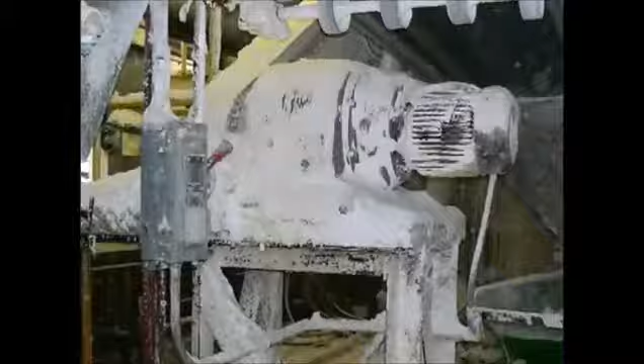No company wants to see its facility blown up and destroyed and its employees killed, but they just don't understand what the hazard is. They don't realize that they have a hazard here until that one day when the explosion occurs, and it's a terrible tragedy for them. And they look back and say, if we'd only known.

When Tammy Miser got a phone call late one evening in 2003, she worried it would be about her brother, Sean Boone, who worked at an automotive parts factory. We usually didn't answer the phone that late, but we knew when it kept ringing that there was something wrong, so we answered it.

There had been an accident there before, so I knew. I knew if they were calling me, it was my brother.

Sean Boone was a mechanic at the Hayes Lemmerz plant in Huntington, Indiana. The company produced aluminum car wheels.

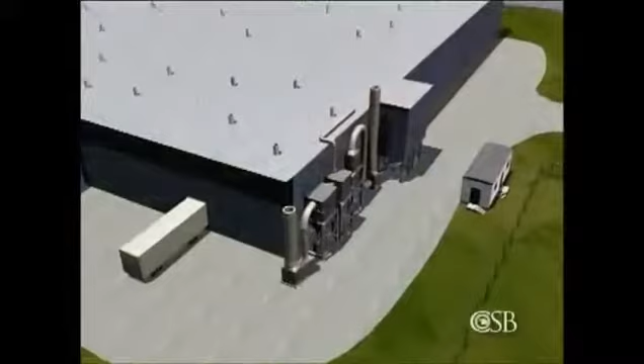The process of finishing the wheels left behind aluminum scraps, which were chopped into small pieces and sent to a furnace to be melted and reused.

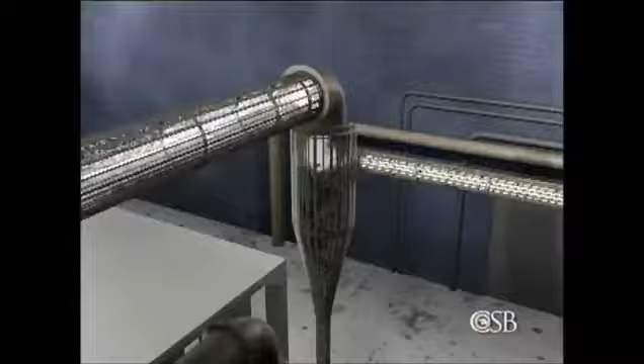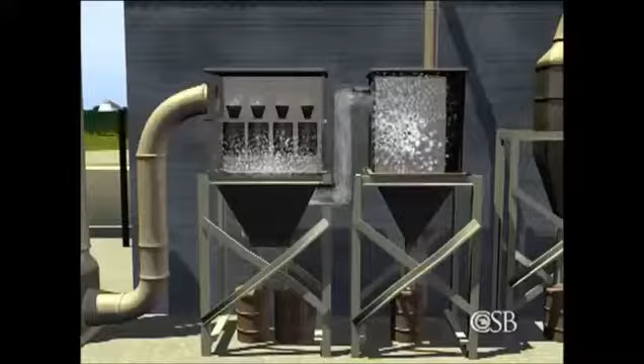Chopping, drying, and blowing the dry chips through the transfer piping created highly combustible aluminum dust, which flowed through ducting to a steel drop box outside the building, where large particles were trapped. The air then entered a dust collector, which removed finer aluminum particles.

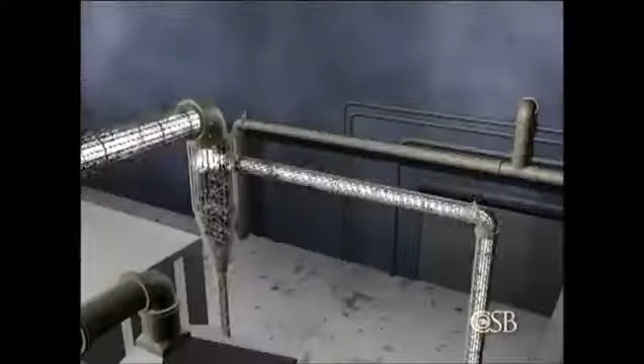Over time, aluminum dust accumulated inside ducts. In addition, there were leaks in the piping used to transfer aluminum chips, which caused dust to build up on surfaces throughout the furnace area. Aluminum dust landed on beams, ledges, and equipment. In some places, the dust was several inches deep.

On the night of October 29th, about 10 minutes after workers started the aluminum chip melting process, aluminum dust inside the dust collector was suddenly ignited, perhaps by a metal ember or impact spark, resulting in a large explosion.

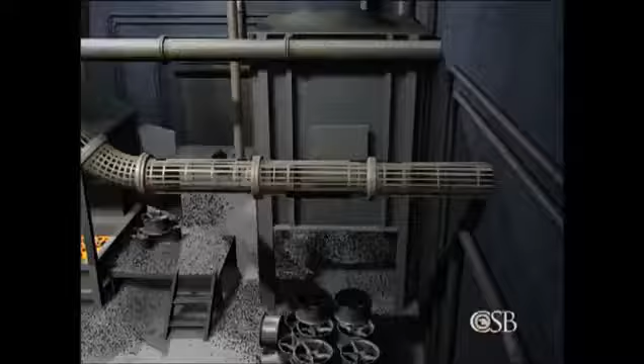The blast propagated back through the duct into the steel drop box, blowing it apart. The fireball and pressure wave continued back through the duct system into the building, gaining intensity as the accumulated aluminum dust ignited.

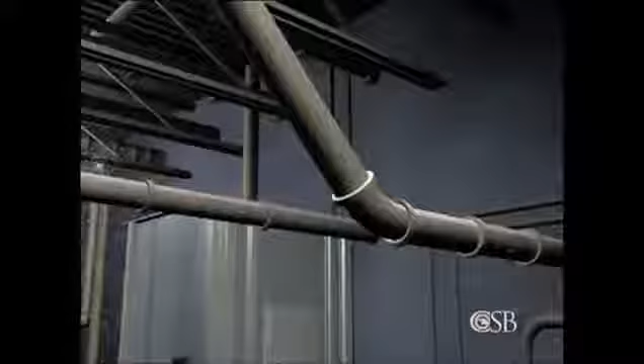The violent disturbance shook loose dust that had built up on external surfaces. At about 8:30 p.m., plant mechanic Sean Boone was one of several workers in the area of the furnace. Without warning, a fireball erupted from the furnace, engulfing the area and igniting airborne dust in a second, larger explosion.

The explosion blew a 50-foot wide hole through the roof of the building. Co-workers found Sean Boone lying on the floor near the furnace, gravely injured. He was rushed to the hospital and put on life support.

And they told us that his internal organs were burnt, and they could take his arms, and they could take his legs, but he probably wouldn't make it, and it would just prolong it. So we went ahead and took him off.

Sean Boone was one of 14 dust explosion fatalities in 2003 alone. Launching a comprehensive investigation into the hazard, the CSB held 2 public meetings, convening panels of experts and listening to extensive public comment. First, combustible dust is a real serious problem in all of general industry.

The CSB report concluded that good engineering and safety practices to prevent dust explosions have existed for decades, but there is no comprehensive federal standard requiring adherence to those practices. And many companies are not taking effective actions to control dust hazards.

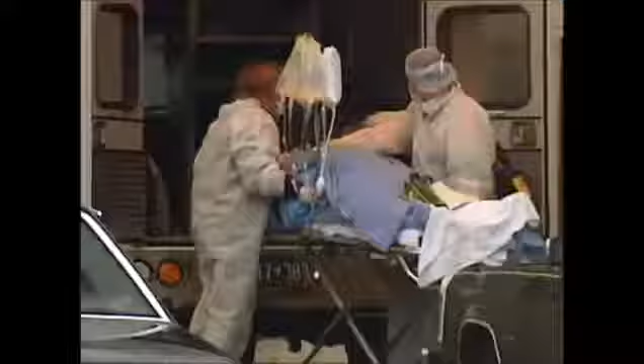Resin dust exploded at the Jahn Foundry in Springfield, Massachusetts in 1999, killing 3 workers and injuring 9 others. Rubber dust exploded at Rouse Polymerics in Vicksburg, Mississippi in 2002, leaving 5 dead. A nylon fiber explosion destroyed Malden Mills in Methuen, Massachusetts in 1995.

In fact, between 1980 and 2005, the CSB found at least 281 combustible dust fires and explosions that caused 119 deaths, 718 injuries, and major damage to industrial facilities.

Amy Beasley Spencer is a combustible dust expert at the National Fire Protection Association, or NFPA. Beyond the loss of life and the injuries, when you think about the economic impact of a dust explosion, you hear about plants being completely destroyed. There's loss of jobs. It's an economic impact on the entire community.

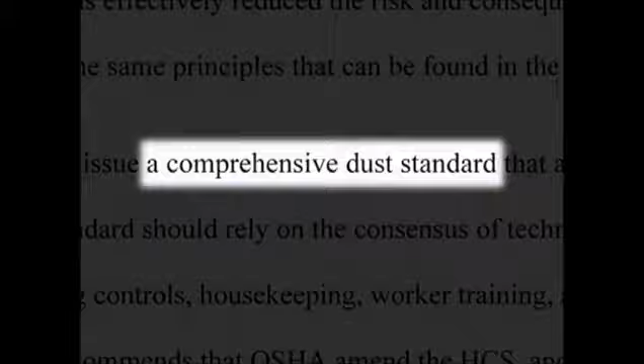The CSB report called on OSHA to establish a comprehensive regulatory standard designed to prevent dust explosions in general industry. The board said OSHA should base the new regulation on the current standards of the NFPA. These codes address hazard assessment, engineering controls, housekeeping, building design, explosion protection, operating procedures, and worker training.

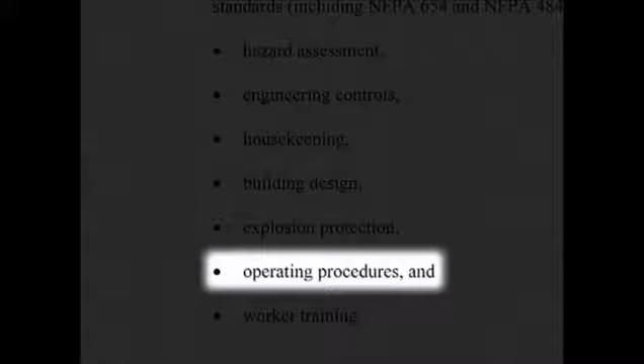The NFPA codes and standards have been in existence since the early 1920s, and there are 7 codes and standards that deal directly with dust. It's a tragedy to have even one loss of life because the technology is out there to prevent these dust explosions.

In addition to the NFPA, the Center for Chemical Process Safety, as well as a leading insurance company, have developed recommended practices on controlling combustible dust.

The board also called for improved training of OSHA inspectors to recognize dust hazards. Interim CSB Executive William Wright explained the recommendation before the House Committee on Education and Labor in March 2008, citing 3 dust explosions the CSB had investigated in 2003.

State OSHA officers had inspected all 3 facilities prior to the accidents, but the dust hazards were never recognized or cited. Furthermore, the CSB determined that all 3 explosions could likely have been prevented if the facilities had implemented NFPA recommended practices.

In addition, the board recommended that OSHA revise its hazard communication standard to ensure that material safety data sheets better communicate dust hazards to workers.

In response to the CSB's recommendations, in 2007, OSHA increased the enforcement of existing regulations through a new national emphasis program on combustible dust. Without a comprehensive standard for combustible dust, it's difficult for businesses to know which specific NFPA provisions or other requirements they may be subjected to.

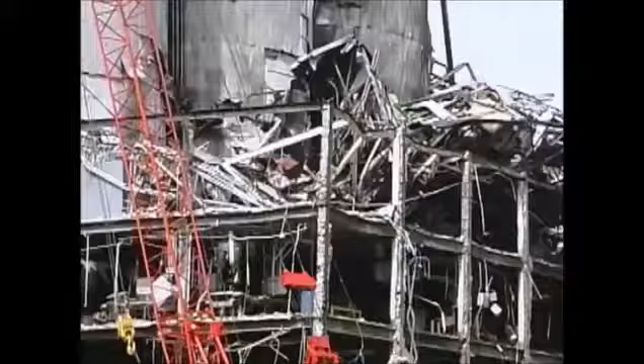The explosions tragically continue. The list includes the blast that crippled the Imperial Sugar Refinery outside Savannah, Georgia, in February 2008. Since 2005, about 70 additional dust explosions have been reported. In fact, the Imperial accident last month is the deadliest industrial dust explosion in the United States since 1980.

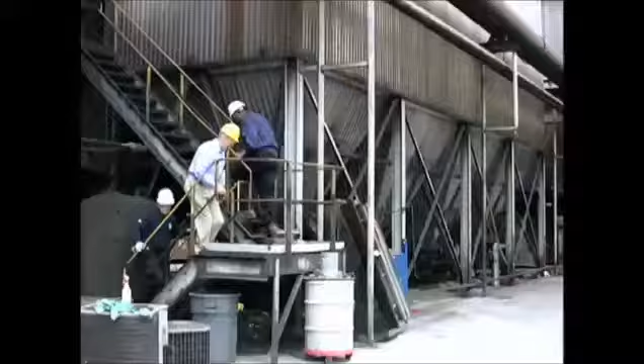CSB Chairman John Bresland: I toured the facility about 6 weeks after the explosion. The damage that was done there was catastrophic. As you walk around the facility, you think of the people who were working there that day, who were killed and severely injured. It was a difficult experience to walk around that facility. It was a very sobering experience.

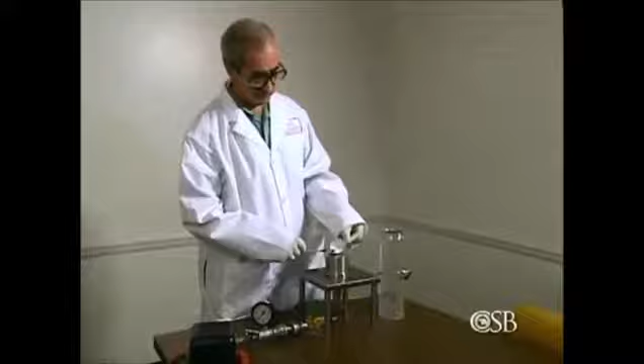What is so frustrating about dust explosions is that they're so preventable. And I believe that one of the reasons that dust explosions continue to occur may simply be a lack of understanding about the materials. Most solid organic materials will explode if the particles are small enough and they're dispersed in a sufficient concentration.

Some of the materials that could form combustible dust, and there are lots of them, could include coal, sawdust, food products like sugar and flour, pharmaceuticals, many chemicals, and even many metals.

Like all fires, a dust fire requires fuel, oxygen, and an ignition source. A dust explosion requires two additional elements: dispersion and confinement.

The CSB commissioned laboratory tests using a sample of fine polyethylene dust found by investigators in the rubble of a North Carolina factory. Dust is dispersed into a flame, creating a fireball.

When dust is confined within a structure or a piece of equipment, a powerful explosion can occur and propagate, as this coal industry video demonstrates.

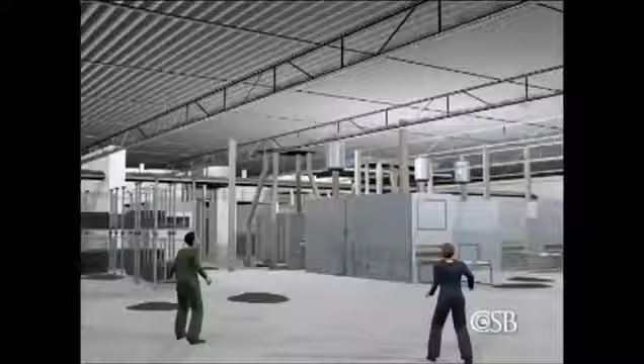Dust may accumulate on surfaces and lie undisturbed for years. Then some initial fire or explosion, known as a primary event, shakes it loose and ignites it. It causes a pressure wave to go through the plant, dislodging dust that has built up unnoticed on the rafters, beams, and tops of equipment. That dust serves as fuel for the secondary explosions that move through the plant. Most fatalities and devastating injuries have been caused by these secondary dust explosions.

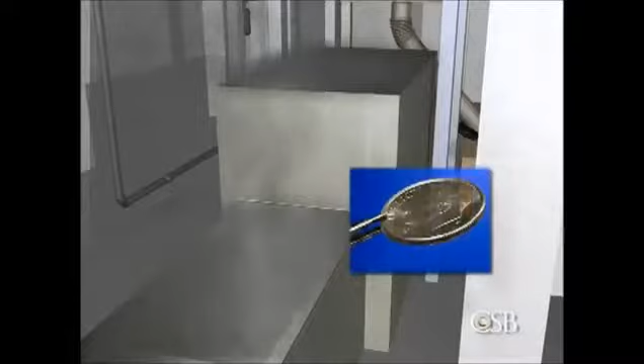According to the NFPA, a catastrophic explosion can occur from as little as 1/32 of an inch of accumulated dust, around the thickness of a dime, covering just 5% of a room's surface area.

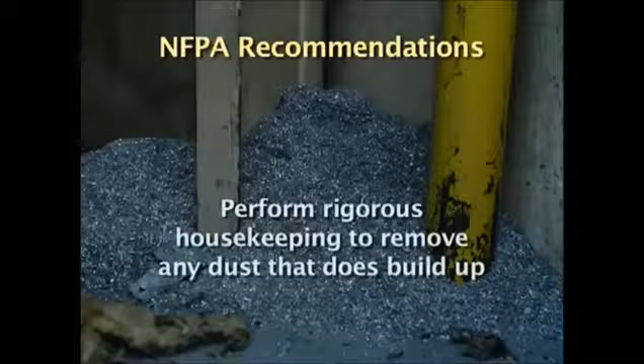The NFPA therefore recommends that companies control fugitive dust emissions, design facilities to prevent dust from migrating and accumulating, and perform rigorous housekeeping to remove any dust that does build up. NFPA codes have been adopted either at the state level or, in some cases, at the local or city level. But the problem is they're not enforced in any regular way.

A catastrophic dust explosion at the West Pharmaceutical plant in Kinston, North Carolina in 2003 reveals what can happen when companies do not properly assess the hazards from combustible powders and do not design their buildings and equipment appropriately. West Pharmaceutical made small rubber medical products, such as syringe plungers and stoppers, at a large manufacturing facility with nearly 300 workers. In the process, large batches of rubber were compounded and rolled into long strips.

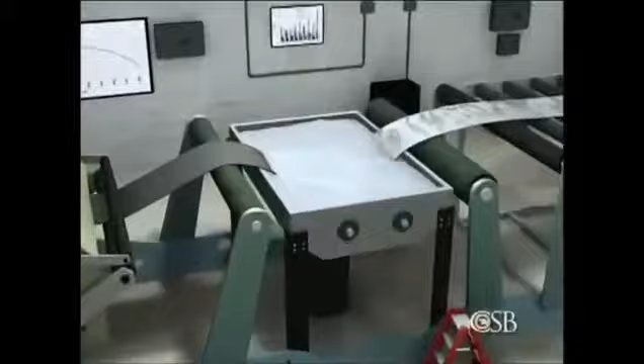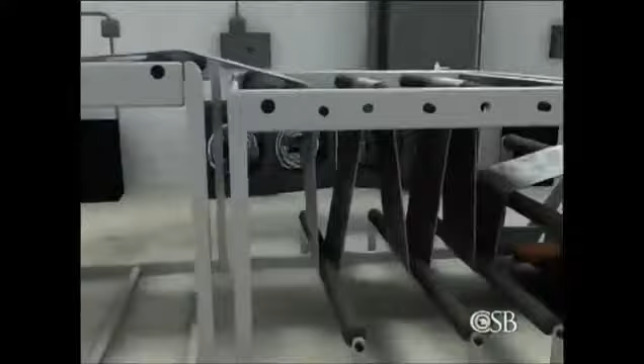To keep these strips from sticking together, they were dipped in a vat containing a whitish slurry of water and finely powdered polyethylene, a petroleum-based wax-like plastic. The coated rubber strips were then blown dry with fans and folded for later processing.

As the rubber sheets dried, combustible polyethylene dust, which was not visible to workers but is colored white here for illustration, was blown into the air.

Over the years, the air conditioning system drew polyethylene dust into the hidden space above an acoustic tile ceiling suspended over the production area. There, the dust gradually built up to a thickness of up to 1/2 inch on ceiling tiles, beams, conduits, and light fixtures, just a few feet over the heads of unsuspecting workers.

January 29th began as a routine workday at the West plant. But at about 1:28 p.m., a small fire or explosion occurred somewhere near the production area. It lofted the accumulated dust above the ceiling into a thick cloud, which then ignited in a much more violent secondary explosion.

Some employees described a sound like rolling thunder as the dust explosion spread throughout the space above the ceiling and ripped through the building. The accident at West Pharmaceutical Services took the lives of 6 employees and injured 38 others, including 2 firefighters. The thing that set up the tragedy at West was the mere accumulation of hazardous dust above a ceiling.

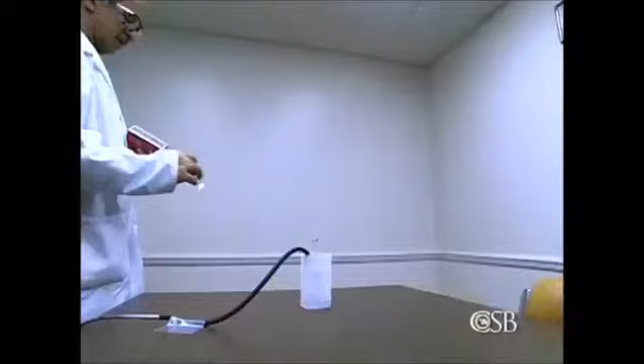If you've got a dust, you need to know its ability to explode, and be able to characterize that dust in terms of how much energy it takes to ignite it, and whether it will create a major overpressure when it explodes. Those are the things that need to be on an MSDS.

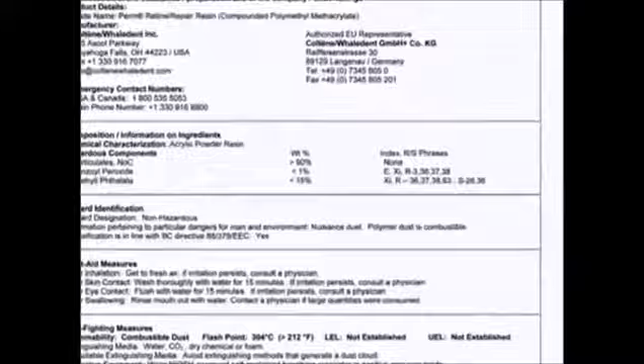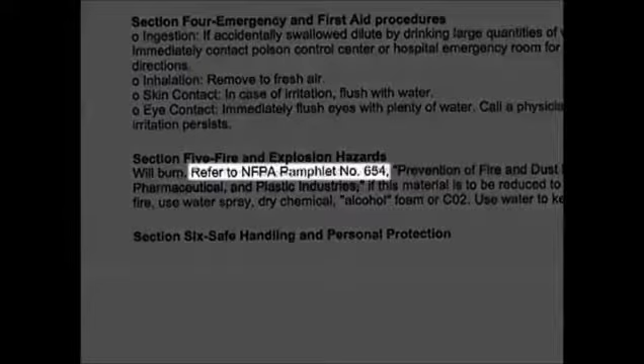The CSB found that the problem of inadequate MSDSs is widespread. Of 140 MSDSs for combustible powders, the CSB found that very few included adequate dust explosion warnings or referred readers to the appropriate NFPA standards. There needs to be better communication to workers on the issue of combustible dusts, through improved information on material safety data sheets.

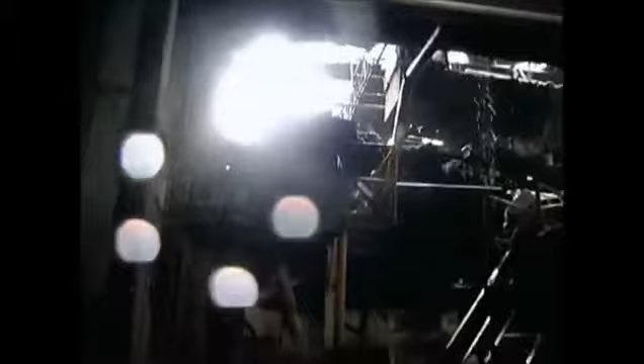Less than a month after the West Pharmaceutical accident, a fatal dust explosion crippled the CTA Acoustics plant in Corbin, Kentucky. The disaster at CTA, which claimed 7 lives, illustrates the critical importance of following NFPA recommended practices to control dust hazards.

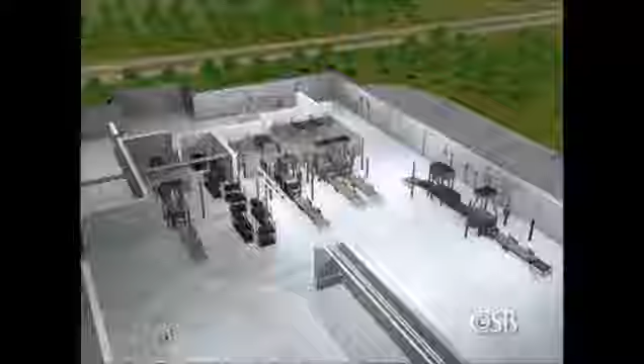The CTA facility, with more than 500 personnel, produced fiberglass acoustic insulation for automobiles. Covering 300,000 square feet, it had 5 production lines. At line 405, fiberglass was fed along a conveyor system and spread to create a web.

Black phenolic resin powder was deposited onto the fiberglass. Hundreds of thousands of pounds of the combustible resin powder were used in the plant every month. Next, the mat former used air suction to spread the resin through the fiberglass.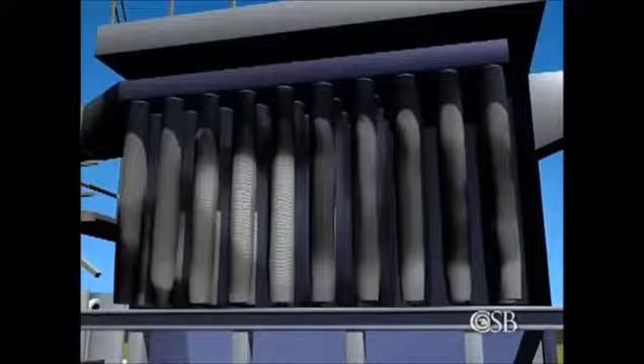Excess powder and fibers were drawn up into a dust collector and rapidly accumulated on long cloth bags. After the mat former, a nylon facing was rolled onto the fiberglass before it entered a gas-heated curing oven. Combustible resin accumulated in the oven, resulting in frequent small fires that were extinguished by workers.

During each shift, the line was shut down for cleaning. On the roof, employees routinely used compressed air to dislodge dust that had built up in the ductwork, dumping the material into a large open box on the production floor.

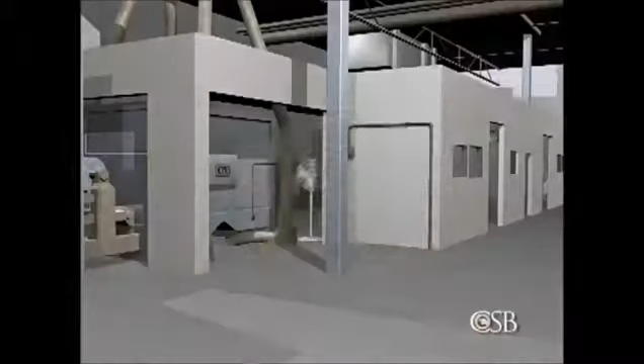On the production line, workers also used compressed air to blow dust off equipment. They swept the production floor with brooms. These cleaning activities created dust clouds so dense that large fans were used to blow the dust away from the operators. This increased the dispersion of dust in the plant.

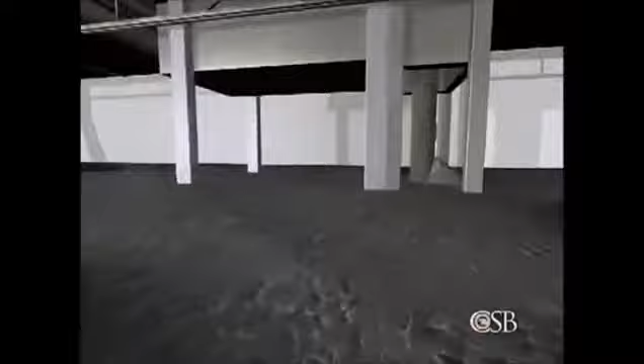The dust settled on horizontal surfaces throughout the entire production area. Over years of operation, dust built up on top of pipes, electrical conduits, and other hard-to-clean elevated surfaces such as roof trusses. A pile of resin dust more than a foot deep had built up on top of the blend room due to periodic cleaning of clogged equipment.

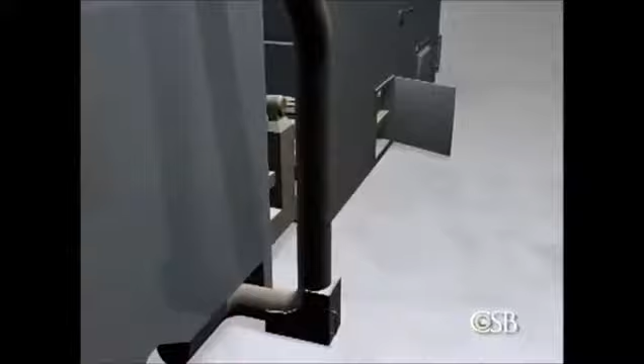On the morning of February 20th, 2003, production line 405 was shut down for routine cleaning. The oven was still on, with one of its doors left open to control the temperature because the oven thermostat had broken weeks earlier. CSB investigators later determined that most likely a small fire, unseen by workers, had started inside the oven, fueled by a buildup of combustible resin.

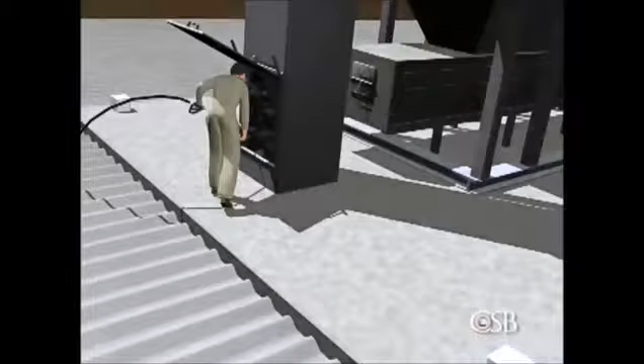During cleaning, workers had discovered that a transition duct leading from the mat former to the dust collector was clogged. They used a compressed air lance to dislodge the material back through cleanout doors into the production area. Together with other cleaning activities, this created a dense dust cloud around line 405. A wall fan blew the cloud toward the open oven.

The dust was ignited by the small fire inside. Flames erupted from the oven, igniting the larger dust cloud, which exploded. This was quickly followed by a second dust explosion at the other end of the production line.

4 employees nearby were injured. 1 later died from severe burns. The force of the 2 explosions shook the building and dispersed accumulated dust throughout the production area.

This airborne dust fueled a quickly moving fireball, spreading west along the roof trusses toward production line 403, which was also surrounded by dust. 4 workers in this area were fatally burned.

The fireball continued past line 402, fatally injuring 2 more workers, and then to line 401, where a third explosion occurred nearly 300 feet from where the first blast was ignited. 3 workers in this area were severely burned.

The 4 production lines were not adequately segregated, and this allowed the dust explosion to very quickly travel from one production line to the next to the next. In this case, most of the employees who died were actually working a far distance from where the initial fire began.

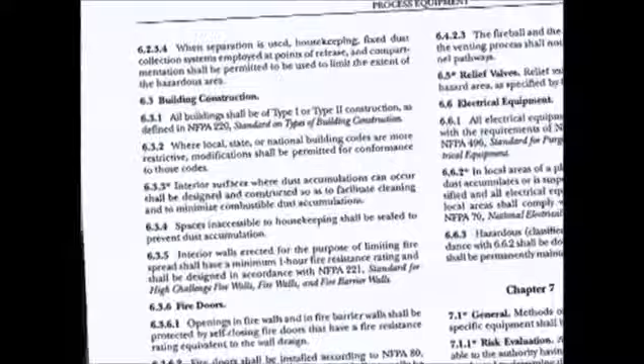NFPA recommends minimizing horizontal surfaces where dust can collect, but the CSB found that this was not done at CTA. At CTA Acoustics, there were many actions being completed that were prohibited in the NFPA codes and standards.

For instance, using compressed air can create more dust in the air, causing a larger fuel load for the actual explosion. CTA personnel also used brooms and fans to clean the production lines, which dispersed dust throughout the building. NFPA standards emphasize safe cleaning methods, such as vacuuming with specialized equipment.

In normal, routine, daily housekeeping, workers address the working and walking surfaces in their production areas. They address their equipment, the places they can see. But when it comes to preventing dust explosions, much more is needed.

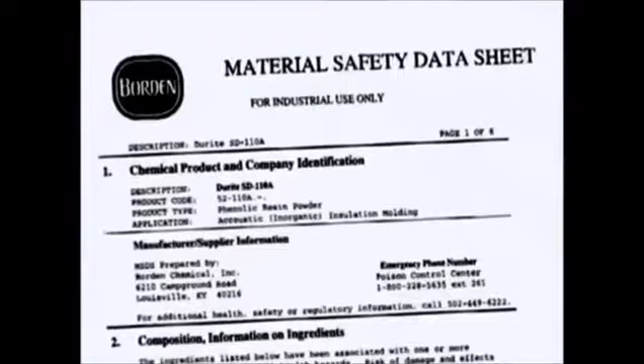You have to clean in the out-of-the-way places, up near the rafters. You also don't want to over-rely on housekeeping, because if you have housekeeping round the clock and you're still seeing layers of dust, you might want to look at your system to see why that dust is being produced in the first place.

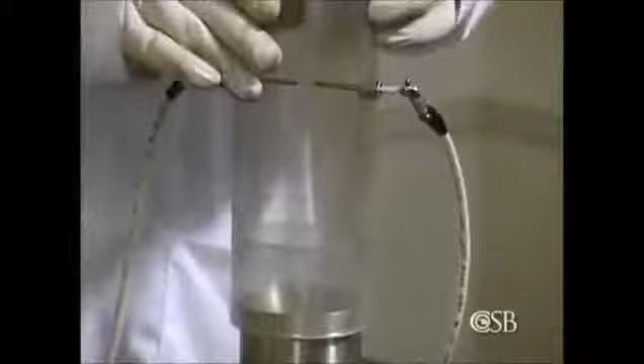Any material that they have in their process in a dust form should be tested to determine if it has a dust explosion potential or not.

In the 1970s and 80s, the U.S. experienced a series of grain dust explosions that killed many people. OSHA responded with new regulations in 1987 requiring preventive maintenance, worker training, and formal dust cleaning programs in grain handling facilities. A 2003 OSHA analysis concluded that the number of deaths from grain dust explosions had dropped dramatically.

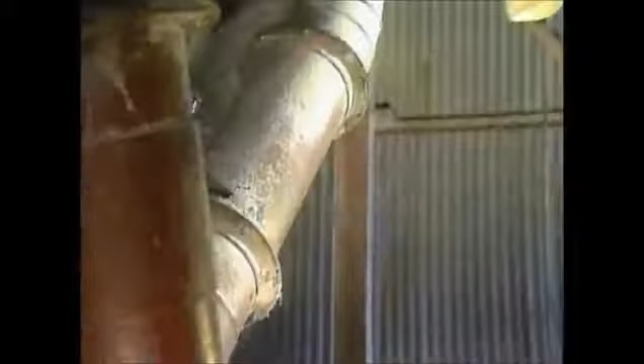OSHA has a specific standard for grain dust, and that's been a very successful standard, significantly reducing the number of accidents involving grain dust. I believe if there were a national OSHA requirement dealing with dust explosions, the incidents would be significantly decreased.

In April 2009, Secretary of Labor Hilda Solis announced plans for a comprehensive regulatory standard. Where workers are in danger, where mandatory regulations make sense, we will act and we will implement. And I'm announcing today that OSHA will begin the rulemaking on combustible dust.

What I feel that we need to do to prevent combustible dust explosions is threefold. We need education—we need industry to understand what the hazards are. We need regulation—we need a comprehensive combustible dust regulation. And we need enforcement of the regulation. I feel if we do all three, we'll go a long way to preventing these terrible tragedies that we're seeing with combustible dust explosions.

The only way to keep my brother from dying in vain would be to make changes. And if there's not a change made, well, then it's going to happen again.

I hope that people who watch this video will take the lesson that they really need to do something to prevent combustible dust explosions. For more information on combustible dust, please visit csb.gov.